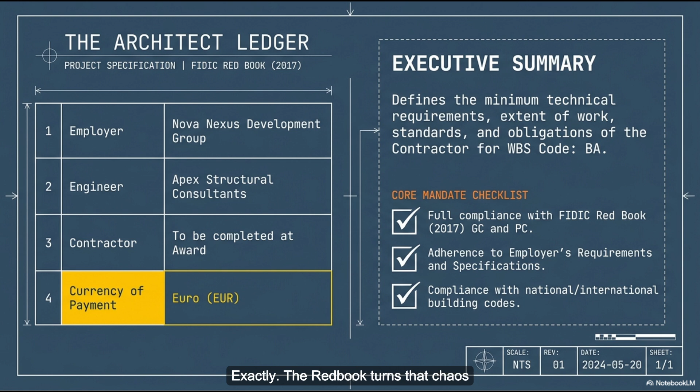Without a definitive line in the sand establishing who holds the risk for every single screw and every single drop of paint, you would have complete anarchy, total chaos. The Red Book turns that chaos into an uncompromising, legally binding reality.

Which brings us to what I'm calling the pregame. Ah yes, the paperwork. So much paperwork. Because before we can even talk about pouring concrete or raising steel, we have to look at the invisible safety net that gets constructed before a single tool is lifted on site. The general obligations of the contractor.

And the timeline demanded here is incredibly aggressive. It's brutal. Under subclause 8.3 of the FIDIC rules, the contractor has exactly 28 days from the official commencement date to submit a microscopic, heavily detailed construction program. And that 28-day window is really just the beginning of the paperwork.

The contract mandates that at least 21 days before the contractor starts any critical activity, like pouring structural foundations, installing waterproofing, or putting in fire-rated systems, they have to submit a formal method statement. I actually saw that in the sources.

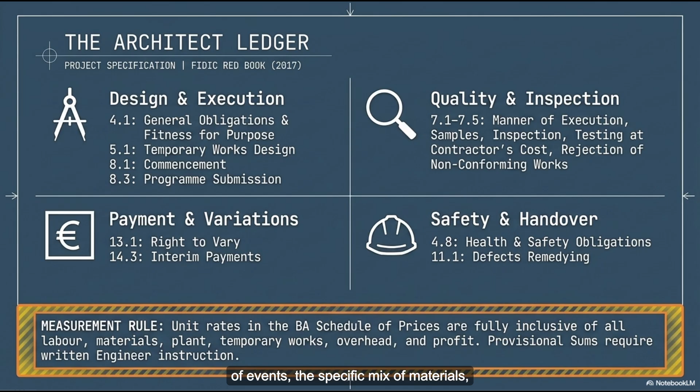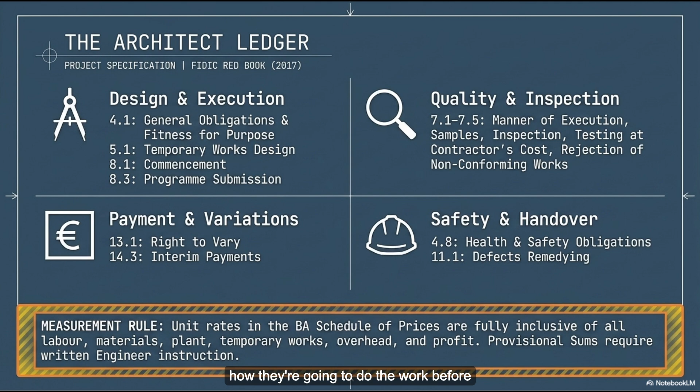A method statement isn't just a brief summary saying we plan to build the wall on Tuesday. Not at all. A method statement is a comprehensive engineering and logistical defense of how the contractor plans to execute the work safely and correctly. It includes the exact sequence of events, the specific mix of materials, where the cranes will be positioned, how the weather will be monitored, and all the safety protocols for the workers. They have to mathematically prove how they're going to do the work before they are legally permitted to touch the site. That is wild.

And that actually ties into a recurring character I kept noticing in the sources, the quote-unquote engineer. Throughout this FIDIC framework, specifically in subclauses 7.3 and 7.5, the document outlines this really obsessive need for the engineer's no objection.

Yes, the engineer is a crucial figure. In FIDIC contracts, the engineer is an independent third-party professional appointed by the employer to administer the contract. They're the referee. A very powerful referee—they hold the absolute right to inspect every stage of the work, test the materials, and summarily reject anything that is non-conforming.

And it goes beyond just standing on site with a clipboard, right? Way beyond. Under Section 7.2, the contract mandates that for every single architectural finish or system, the contractor has to submit physical samples—not just a swatch or a paint chip, they actually have to construct full-scale sample panels and physical mock-ups, which is a massive undertaking. Sometimes they are mandated to build an entire square meter of a brick wall just to get a written no objection from the engineer so they can commence the full-scale procurement.

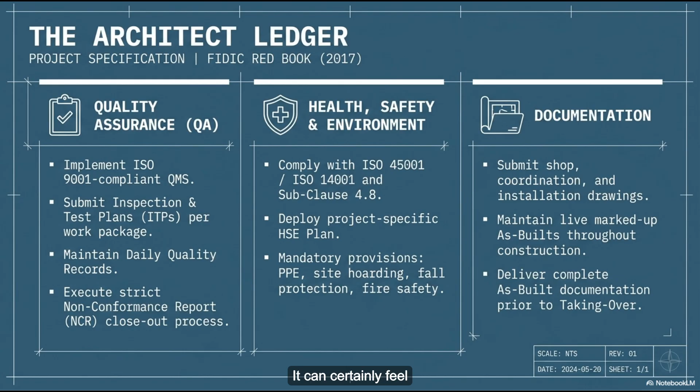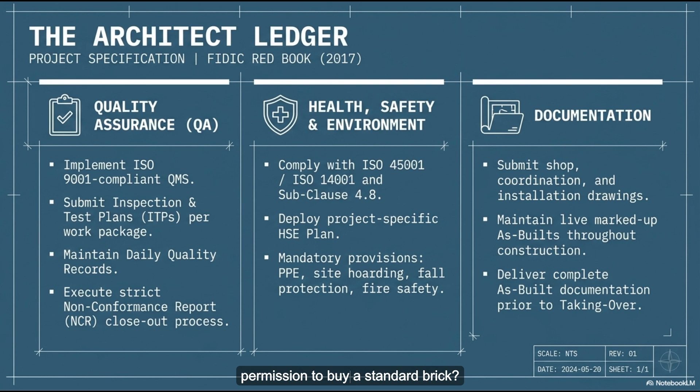Which brings me to a genuine question. Is this engineer essentially a dictator? It can certainly feel that way to the contractor. Why does a highly experienced multi-million-euro contracting firm need to build a tiny sample wall just to get permission to buy a standard brick? Doesn't that just grind the entire momentum of a project to a halt?

It sounds incredibly bureaucratic, yeah. Maybe even pedantic from the outside looking in. Very pedantic. But you really have to view this through the lens of the massive financial and safety stakes involved.

Okay, fair enough. This specific contract explicitly states that the currency of payment is the euro. And when you are operating on a project using euros at a mega project scale, a tiny deviation doesn't just cost a few hundred euros. It scales exponentially.

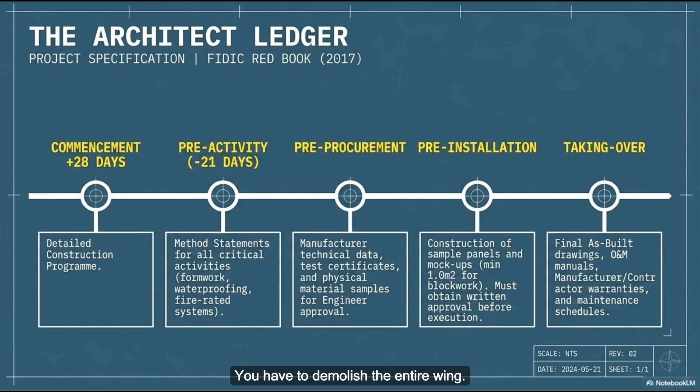Exponentially. If a contractor bypasses that mock-up phase, buys say 50,000 hollow concrete blocks, and builds an entire wing of a hospital—oh no, I see where this is going—and then the engineer discovers those blocks don't meet the acoustic requirements, you can't just paint over a structural acoustic failure. You'd have to tear it down. You have to demolish the entire wing. The financial liability of tearing down a completed wing would bankrupt most companies.

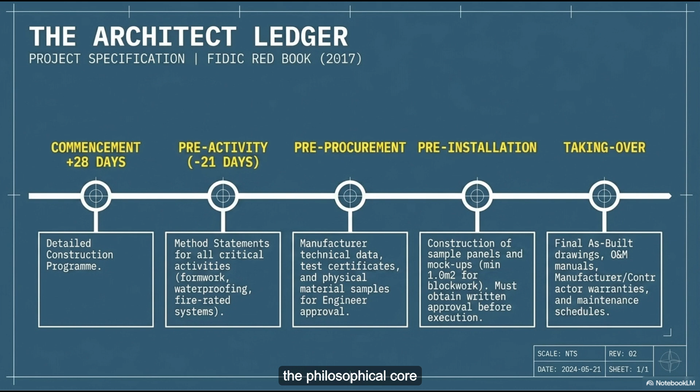Precisely. And that is why subclause 4.1 is really the philosophical core of this entire document. It emphasizes the concept of fitness for purpose. Right, the contractor isn't just obligated to build a wall—they are legally obligated to build a wall that perfectly serves its intended architectural and engineering function.

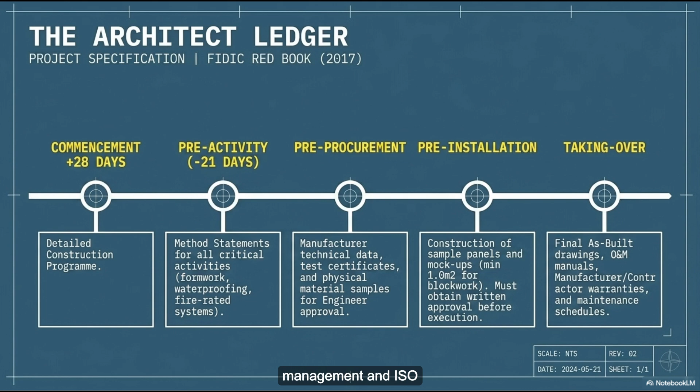So it's not just about aesthetics. Not at all. The building isn't just a physical object, it is a legal object manifested in physical space. I like that. So those mock-ups, along with the strict adherence to ISO 9001 for quality management and ISO 45001 for health and safety, those are basically mechanisms of survival. Right, because ISO 9001 isn't just a vague commitment to being good at your job. No, it is a verifiable, highly rigid audit trail.

So the engineer isn't being a dictator—the engineer is enforcing a mathematical certainty of success to prevent catastrophic loss of capital and potentially loss of life. That completely reframes the bureaucracy for me. It's not red tape, it's an empirical reference standard. Exactly. If the final wall doesn't match the approved mock-up, there's no debate. Not at all. So the rules of engagement are set. The safety net is up.

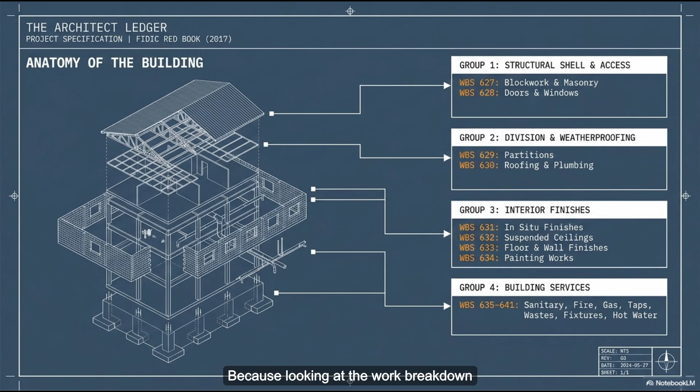The mock-ups are approved. Now we transition from the legal framework to the actual physical anatomy of the build. The fun stuff, right, because looking at the work breakdown structure in this document, the WBS—the famous WBS—here's where it gets really interesting. Reading this WBS is like looking at the most intense taxonomy of materials ever conceived by human minds.

It really is. The work breakdown structure is brilliant because it assigns a unique numerical code to every single component to prevent total anarchy. It's that DNA sequence again. Exactly, you mentioned earlier that this is like DNA—the WBS is the sequencing of that DNA. The 600 series handles the architecture, with further subdivisions for structures, finishes, and services.

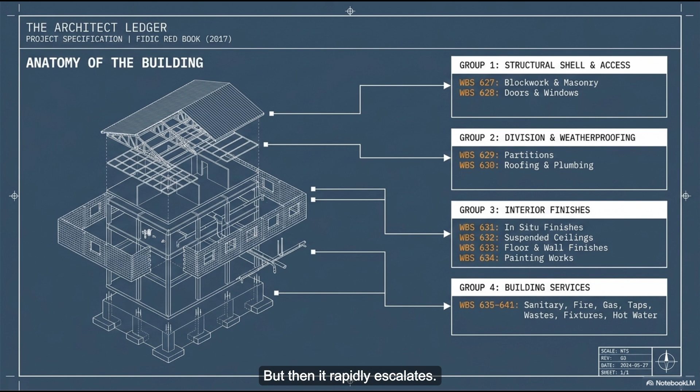I was looking specifically at WBS 627, which covers blockwork and masonry. And it starts normally enough—it asks for standard 150 millimeter hollow concrete blocks. Very standard, but then it rapidly escalates. Suddenly the contractor is required to procure a 'scoria blend block' that guarantees exactly 2, 3, or 4-hour fire insulation. What exactly is a scoria blend, and how does a block of masonry guarantee 4 hours against a raging fire?

Well, scoria is actually a highly vesicular volcanic rock. Wait, volcanic? Yeah, from a volcano.

When a volcano erupts, the trapped gases in the cooling magma create this incredibly porous, lightweight stone. And because it is filled with all those tiny air pockets, it acts as a phenomenal thermal insulator. By blending scoria into the concrete mix, the block literally stops the transfer of heat.

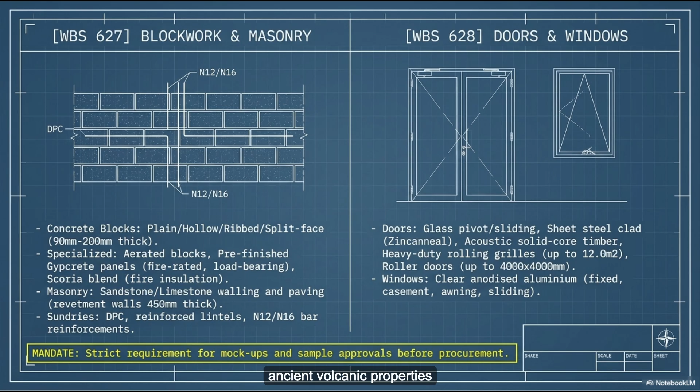Why is that so critical for this building? Because in a massive facility, if a fire breaks out, standard structural steel will warp and buckle under extreme heat in minutes, which leads to a total collapse. But the scoria blend blocks isolate the heat, giving firefighters exactly 4 hours to extinguish the blaze before the structural integrity of the surrounding areas is compromised. It is a beautiful example of utilizing ancient volcanic properties for modern engineering safety.

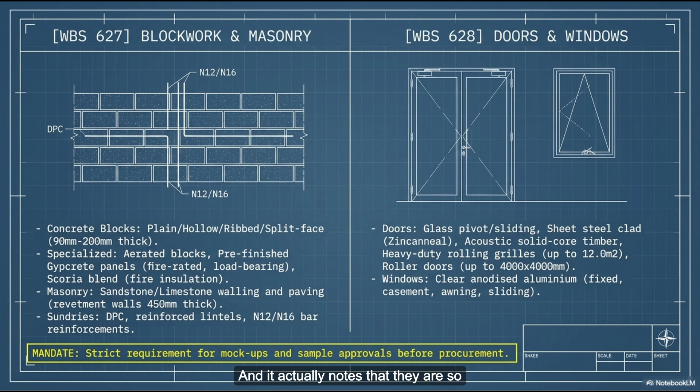It is wild to think about volcanic rock being mandated in a modern legal document. You don't expect to see that in a contract. And right after that, under the exact same WBS section, it demands pre-finished gypcrete panels for load-bearing walls. And it notes that they're so massive they explicitly require craneage.

Gypcrete is a high-density gypsum concrete. How is that different from regular drywall? It's completely different. Unlike standard drywall, it is incredibly heavy and dense. It's used for extreme load-bearing or severe acoustic deadening between sensitive zones in a facility. So you can't just have a couple of guys carry it in. No, they're so dense that manual labor can't place them. The contractor must engineer specific crane pathways just to swing them into the building footprint.

Just incredible planning required. And the granularity extends to the doors as well. Under WBS 628, the taxonomy of doors is just staggering. Under 628.002, you have simple pivot glass doors. But slide down to 628.004, and the contractor must install a 1-hour fire-rated duct access door made specifically of Zincanneal steel.

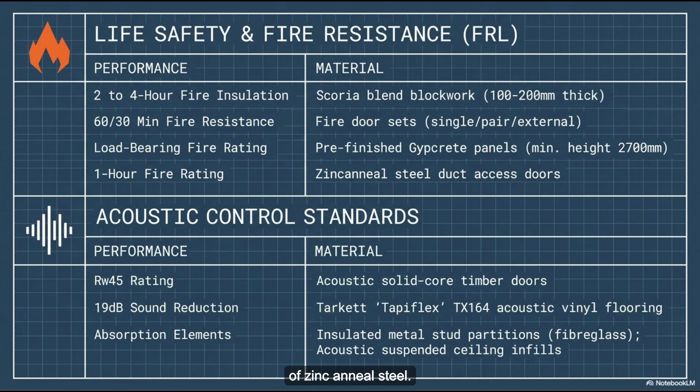Why mandate that specific type of metal just for a duct door? Because duct access doors live in a really harsh environment. A duct? Oh yeah, they handle constant moisture from condensation and severe pressure differentials from the HVAC system. I guess I didn't think about the moisture.

Zincanneal steel is steel that has been subjected to a galvannealing process, meaning it is coated with a zinc iron alloy. So it doesn't rust? It doesn't just prevent rust, it creates a matte surface that binds perfectly with paint while remaining highly corrosion resistant. If a standard steel door was used there, it would rust, the seal would fail, and the HVAC containment for that entire zone would be completely breached.

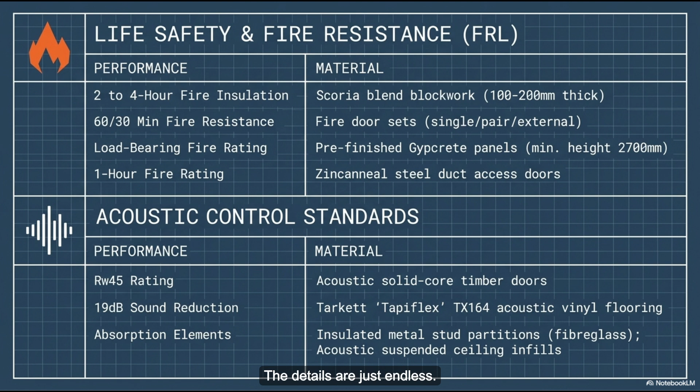The details are just endless. And a bit further down, under 628.009, we find solid core acoustic timber doors rated at exactly RW45. Which loops back to the doorknob analogy we opened with. You explained that RW45 isn't just a random label.

RW stands for Weighted Sound Reduction Index. The decibel scale is logarithmic, meaning every single decibel represents a significant leap in sound energy. It's not a linear scale.

No, not at all. So an RW45 rating means that specific door, along with its frame and acoustic seals, has been scientifically tested in a laboratory to reduce sound transmission by exactly 45 decibels. If a contractor tries to save money by installing a door rated at RW44, they are mathematically violating the fitness for purpose clause, and the engineer will reject it outright under subclause 7.5. Close enough simply does not exist in this vocabulary.

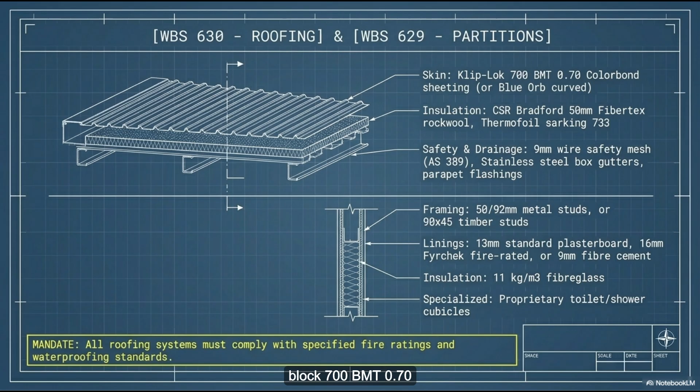Never. And you see this exact same obsession with precision in the building finishes, WBS 630 and 633. The finishes are where it gets really specific. For the roof, the contract doesn't just ask for basic metal sheeting. It specifically mandates Klip-Lok 700 BMT 0.70 Colorbond roof sheeting, and it stipulates it can only be used on roof slopes not exceeding 22.5 degrees.

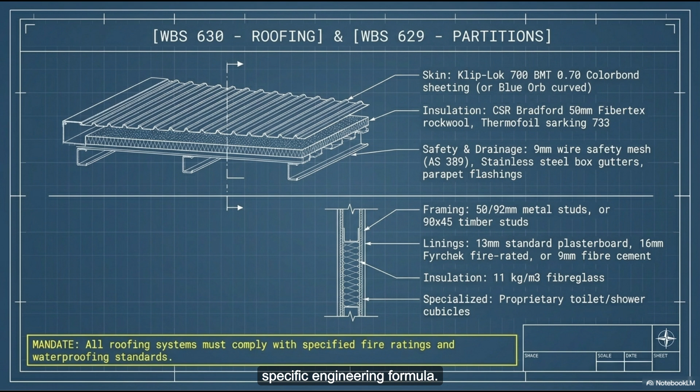I have to admit, Klip-Lok 700 BMT 0.70 Colorbond sounds like a password to a military server. I can see that, but it is a highly specific engineering formula. Let's break it down. BMT 0.70 refers to the base metal thickness, so exactly 0.70 millimeters of ultra-durable steel.

Colorbond means the metal features a specialized oven-baked paint finish, designed to withstand decades of harsh UV radiation without degrading. So the paint won't flake off in the sun? Right. But the most important part is the Klip-Lok designation.

I assume that refers to how it actually attaches to the building. Exactly. Traditional metal roofs are secured by driving hundreds of screws directly through the metal panels into the frame beneath. Like nailing shingles? Kind of, but every single screw hole is a potential leak point. Oh right, because you're putting holes in the roof. Exactly.

A clip-lock system uses concealed brackets attached to the frame, and the metal sheets literally snap or clip down onto those brackets. That's brilliant, there are zero screw penetrations through the actual roof surface. Which means no leaks? Ideally, yes.

I see. And the contract restricts it to a 22.5-degree slope to ensure that rain and debris shed at the exact required velocity. The floors are equally regulated, too.

Oh yes, looking at WBS 633, the document specifies a cementitious topping called Pandomo, which legally requires an exact R10 slip resistance. R10? Or, if a space uses vinyl, it must be a Forbo Smaragd marble vinyl that is entirely chemical resistant. This really highlights how aesthetics and safety are seamlessly integrated. Pandomo gives a beautiful, seamless, modern concrete look. It's very trendy right now.

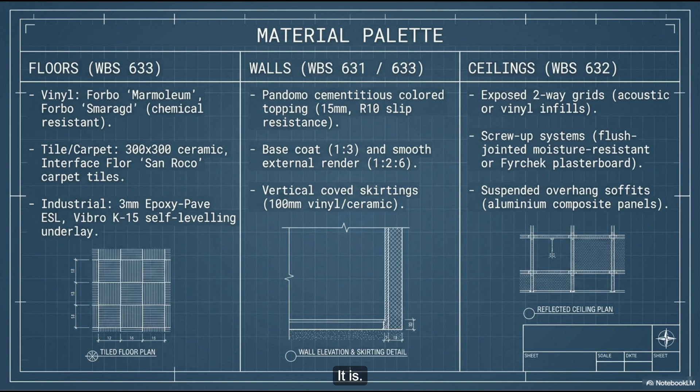It is. But R10 isn't just a suggestion to make the floors somewhat grippy. Like, just put some texture on it. No, it is a scientifically derived coefficient of friction, determined through strict ramp testing protocols. If someone slips and injures themselves on that floor five years from now, the first thing the legal teams will do is test the slip resistance.

Oh, absolutely. If the contractor used an unauthorized sealant to save time, and that sealant dropped the friction from an R10 to an R9, the contractor assumes total liability for that injury. So the paperwork and the approved mock-ups from the pregame, they actually serve as legal armor for the contractor years later. Absolutely, the bureaucracy protects the contractor just as much as it protects the employer. That makes so much sense.

So having explored the physical shell, the clip-lock roof, the RW45 acoustic doors, and the chemical-resistant vinyl, our next area of focus within the sources is the inner workings of the building. The services. And crucially, the boundaries of what this contract actually covers.

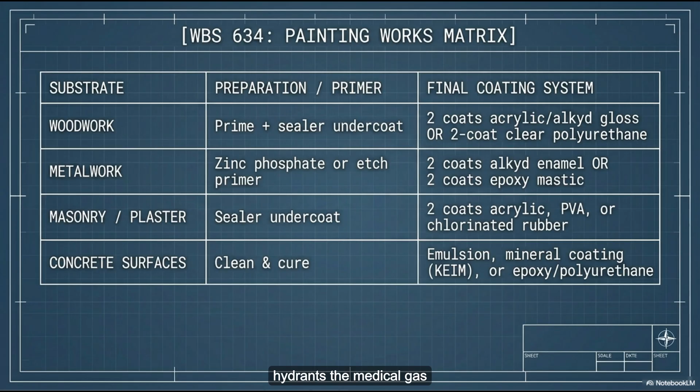WBS 635 through 641 covers these services. This is the internal plumbing, the fire hydrants, the medical gas lines. And the juxtaposition in this section is just striking to me.

Well, under WBS 638, the contract mandates precise plumbing connections for basic coffee machines and cafeteria Bain Maries. But in the exact same paragraph, it mandates the plumbing for emergency safety shower and eye wash stations. It's just kind of jarring to see a coffee maker and a critical life safety eye wash station treated with the exact same level of contractual severity.

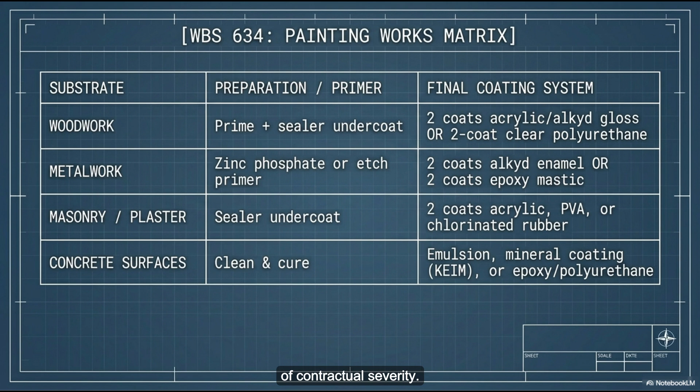I get that, but they share the same internal water infrastructure. Oh, they're connected. Yeah, if a contractor improperly plumbs the coffee station and creates a massive pressure drop in the system, that eye wash station might not function when a lab technician desperately needs it. Wow, I didn't even think of that. Yeah, every single connection is critical.

Which makes total sense, but this actually brings me to a part of the document that genuinely threw me. Section 6, exclusions. Ah yes, after tens of thousands of words detailing every millimeter of paint thickness and floor friction, the contract explicitly states what it does not cover, the boundaries of the contractor's jurisdiction.

And the boundaries are massive. I mean, this contract explicitly excludes all demolition work. It excludes below-ground waterproofing. It excludes the entire HVAC system, so no air conditioning or heating at all. None. And most surprisingly, it excludes the actual structural foundations of the building. All of that falls under civil works or entirely separate mechanical contracts.

So what does this all mean? I really want to push back on this, because to a layperson it sounds entirely counterintuitive. It does sound a bit crazy. Right, you have an exhaustive architectural document that governs the entire physical reality of the building, but it doesn't even cover the concrete foundation the building sits on, or the air conditioning that makes it livable. How does a multi-million-euro facility not just become a disjointed mess?

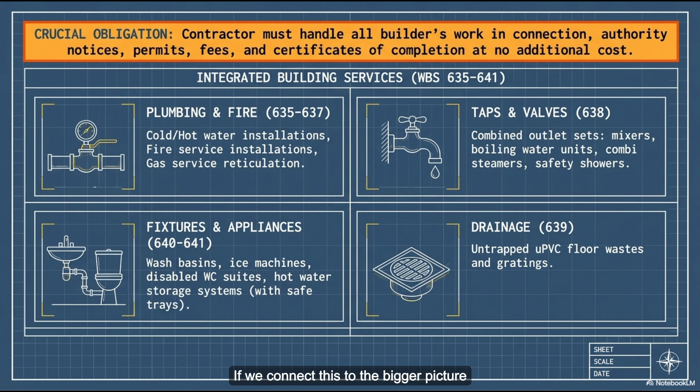It seems counterintuitive until you look at how modern mega project liability is actually structured. Okay, tell me more. If we connect this to the bigger picture, heavy infrastructure projects have evolved, become incredibly siloed. Siloed? Yes, and the driving force behind this is risk separation.

Can you explain how risk separation works in this specific context? Sure. You do not want the company that specializes in installing chemical-resistant floors and acoustic timber doors to be the exact same company boring a 50-foot deep concrete foundation into the earth. I guess that makes sense. They require entirely different engineering skill sets, massive differences in heavy machinery, and completely different risk profiles.

Right, the guy painting the walls shouldn't be pouring the foundation. Exactly. If the foundation settles incorrectly and compromises the structural integrity of the facility, the employer needs to hold the heavy civil engineering firm liable, not the architectural contractor. So it's about pinpointing the blame. You separate the risk so that legal and financial accountability is laser-focused.

To use an analogy, it's like a complex surgery. You don't want the anesthesiologist performing the cardiac bypass. Both are absolutely critical, but they operate in highly specialized, completely distinct lanes. That clarifies it perfectly. It's about protecting the overall investment by hiring hyper-specialists and keeping their liabilities completely fenced off from one another.

But speaking of liability, let's look at the aftermath. Based on the Red Book framework, what actually happens when the building is finally finished?

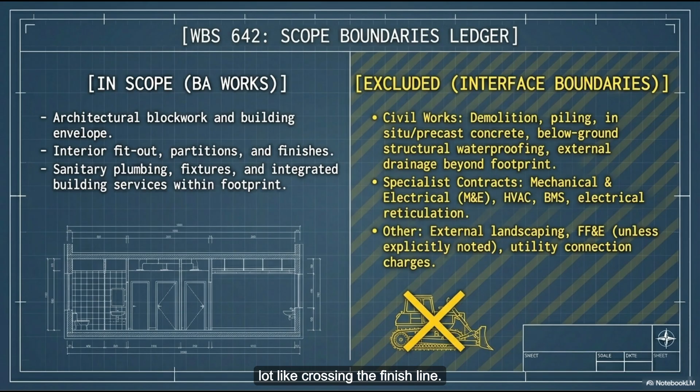Under a FIDIC Red Book contract, the contractor is never truly done just because they hand over the keys. The document mentions the issuance of a taking over certificate, which sounds like crossing the finish line. But immediately after, Section 9 introduces the defects notification period, or DNP, and subclause 11.1 keeps the contractor entirely on the hook for fixing anything that goes wrong. The extended warranties demanded here are intense, ensuring structural and functional integrity long after the ribbon-cutting ceremony.

The contractor is mandated to provide a 2-year warranty for all interior paint and sanitary plumbing, which is standard enough. But they have to provide a 5-year warranty on those fire-rated door sets and all exterior paint. Then the heaviest burden: a 10-year warranty for the roof sheeting and waterproofing.

10 years for a commercial roof. That 10-year warranty on the clip-lock roof perfectly encapsulates why this entire obsessive document even exists. Commercial roofs endure brutal conditions. They face intense UV radiation, dramatic thermal expansion and contraction during day and night cycles, and the physical wear and tear of maintenance crews walking on them constantly. It's not a gentle environment.

If, a decade from now, a single drop of water makes it past that 0.70 millimeter Colorbond steel and ruins an acoustic ceiling tile in an operating room, the contractor is legally obligated to return to the site, identify the failure, and repair it entirely on their own dime.

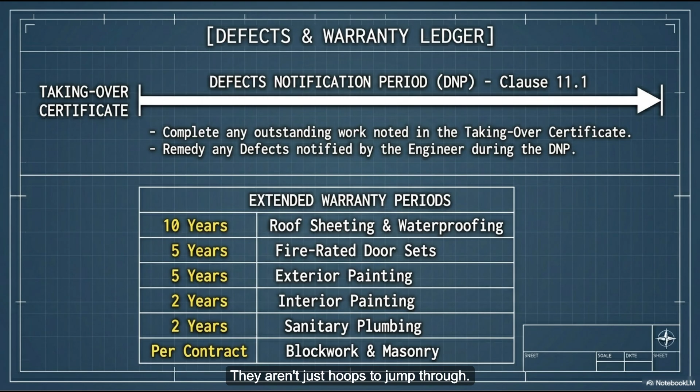Which circles perfectly back to our earlier point. The 28-day construction program, the method statements, the sample panels from the pregame, they aren't just hoops to jump through. They are a lifeline. If the contractor followed the method statement perfectly and the engineer signed off on it, that documentation is their defense. But if they cut a corner, that 10-year warranty is just a ticking financial time bomb. The paperwork and the rigorous mathematical standards are the only things standing between a contractor and devastating long-term liability.

To bring this all together, we started this journey looking at the internationally recognized rules of the FIDIC Red Book, a framework that basically forces a rigid mathematical order onto the inherent chaos of heavy construction. From anarchy to order.

Then we zoomed in to see how everyday materials are transformed into life-saving engineering, from scoria blocks utilizing volcanic properties for 4-hour fire ratings, to pandomo floors where R10 slip resistance is a mathematically enforced safety net, a literal safety net. We explored how risk is carefully separated, like specialists in a surgery, and we ended by looking at the decade-long warranties that ruthlessly enforce perfection long after the cranes have been dismantled.

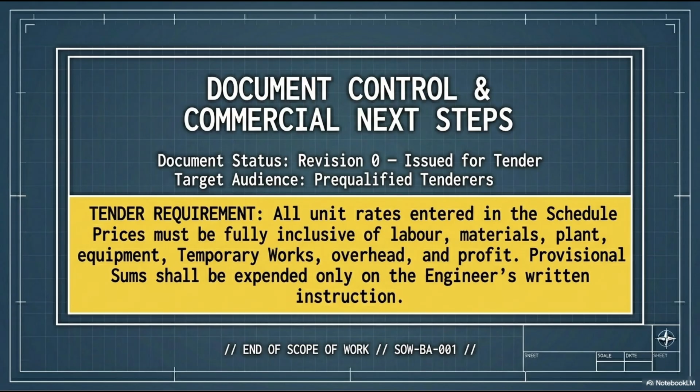Understanding this hidden matrix completely changes how you perceive the built environment around you. It truly does. The next time you walk through a heavy fire door in a hospital, or you notice an emergency eye wash station in a laboratory, or you just look up at an expansive metal roof on a warehouse, you aren't just looking at metal, water, and glass. You are looking at the physical manifestation of a massive, incredibly dense legal and technical apparatus. Every inch of that space is the result of thousands of pages of arguments, mock-ups, and meticulously defined liabilities. It is the abstract law made tangible.

But before we wrap up this deep dive, there's one final detail buried deep in the text that left me with a lingering, almost philosophical question. Deep in the measurement and payment section of the contract, under subclause 13.5, the document outlines something called provisional sums. A fascinating inclusion. The contract dictates that these provisional sums are essentially pots of money set aside, which can only be expended upon the explicit written instruction of the engineer.

Right, it's a reserve fund. Which makes me wonder, if this entire undertaking is mapped out like DNA, rigidly defined down to the very decibel of a door, the thickness of the paint, and the exact coefficient of friction on the floor, what sudden emergencies, what hidden risks, or what ghosts in the machine are they keeping that secret pot of provisional money hidden away for? What exactly is out there that is so unpredictable it can't be planned for, even with the mighty FIDIC Red Book?

That is the ultimate question of infrastructure. Because no matter how flawless the mathematics, the blueprint, and the legal framework, the earth beneath the foundation always holds secrets. Something to mull over the next time you step into a brand new facility. The engineering might be perfect, but the real world is always unpredictable.